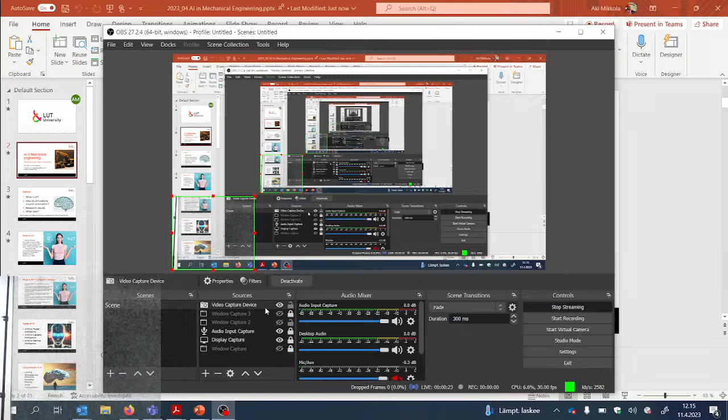Can you hear? Yep, he's unmuted already. So it looks good, and you are online. Okay, it's working, started the streaming. Yeah, streaming is on. Okay, one more thing, this one. Five seconds as usual.

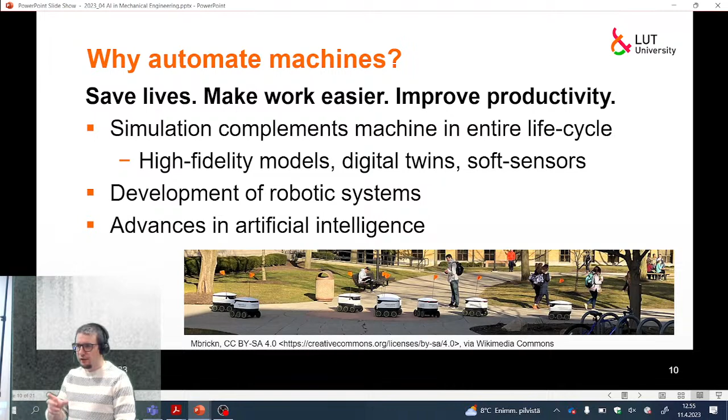Now the question is how to use all this that we are learning, this multi-body system, into AI. How to leverage our simulation and those automatic tools into AI.

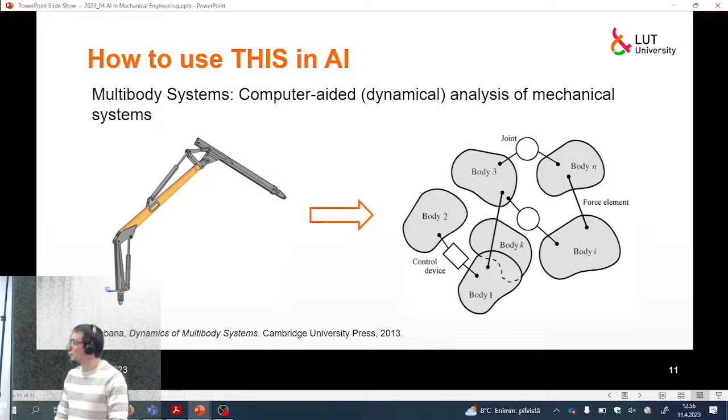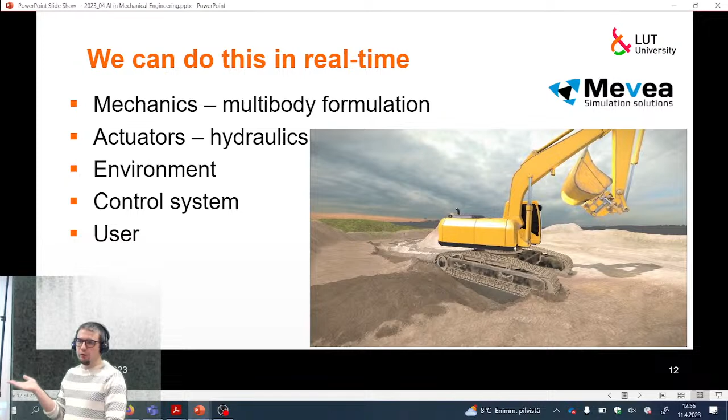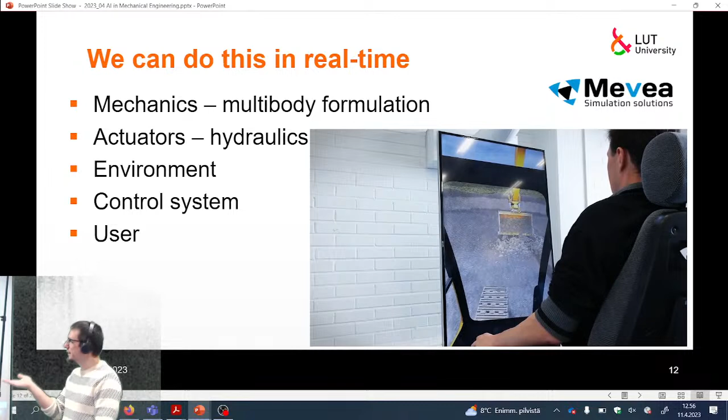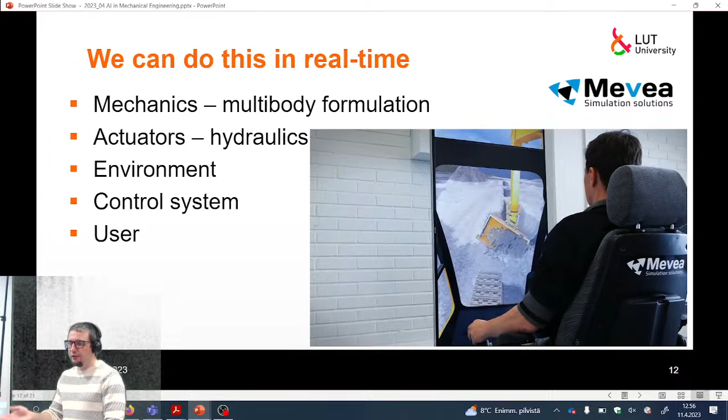What's important is what we can do in practice at the moment. We can create realistic, very fast simulations that can make, like here, this human-in-the-loop actions. It includes many phenomena, including the mechanics, the multibody formulation we are learning about, actuators - in this case mostly hydraulics - and environmental modeling with soil systems. And if we add some control system, we're ready to prepare a good product that can be quite easily, not super easily but quite easily, deployed on the real machine.

So we want to leverage computer simulations to develop all these systems, and one of the main ways is to generate synthetic data.

Okay, I suppose that will do it. And it even hangs. Yeah, it seems so. Of course, I can describe what was there. Can you try to go back? Okay, no. Why did it disappear? It's kind of there, but it's not visible.

Okay, it was a YouTube video of the Google robot farm.

This is a famous example that you can train the system without synthetic data. They used hundreds of robots in their laboratory, making pick and place actions, recognition, and others. So it's possible, but there are issues. It's hard to put 100 excavators somewhere in the field and ask them to dig something just like that. It's time consuming and still costly. Google can afford it, but there aren't many companies or universities that can buy 100 robots just for a single test and run them.

So generated synthetic data is very important. If you want to deploy something useful using reinforcement learning or other AI, we need plenty of high quality data, and usually our simulations, high fidelity simulations, can provide that data. With those simulations we try to predict the future. It's not a new thing, but it can be used in a quite unique way, because by predicting what will happen in the future based on different control inputs, we can choose the best one. There are arguments for that.

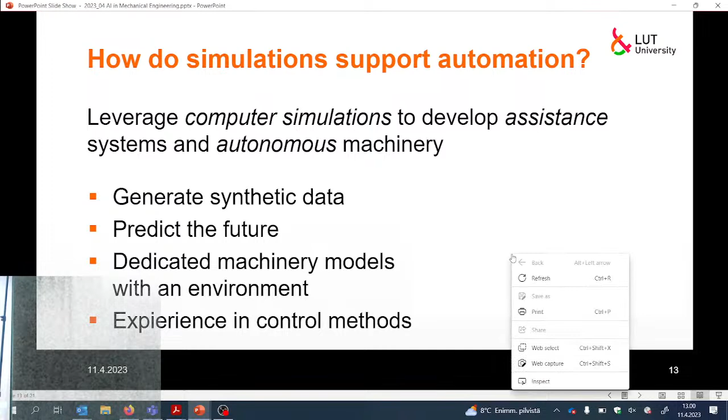These videos, I need to find the Google robot one. Because I can't find it. Google Robot Farm - was it a farm? I don't know. About farming, yeah. Okay, so it's Google Robot Factory. No. Okay, maybe you can provide the link for that video later. Or is it visible now? No, somehow it disappeared. Yeah, it was there. It was here, you can, yeah, there. It is playing, I think it is playing now. Okay, maybe. It is playing now. Large scale data collection - okay, so it was simple like that. Here now there is a...

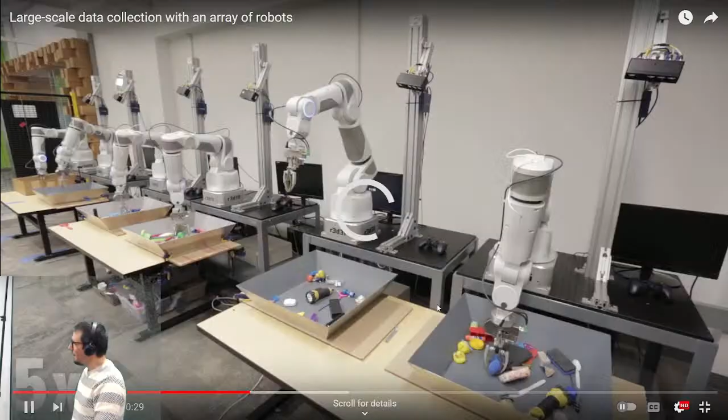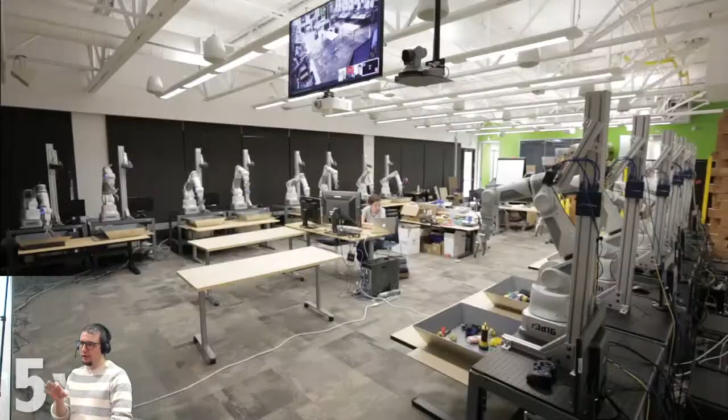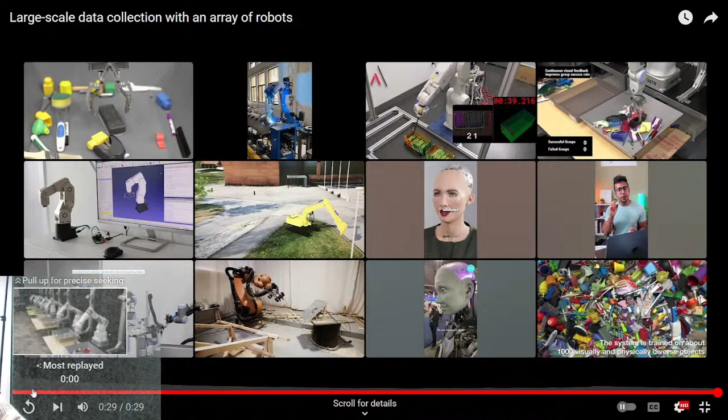This is a famous example showing that despite those algorithms being data hungry - of course they try to find ways to make it less data hungry, like curriculum learning and similar stuff, but in general they are still quite hungry - they created this kind of farm of robots that can really learn.

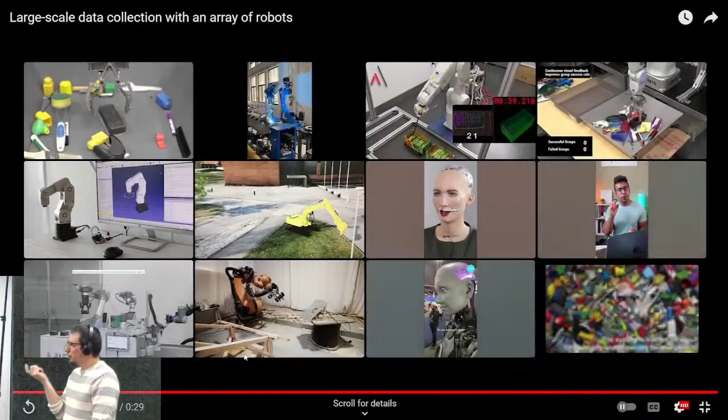But still, if you replace each of those robots with an excavator, it can be done, but this is still a very controlled environment. This is not very complicated. It's controlled, so it's quite easy to ensure they won't cause harm, because industrial robots already have control systems embedded that, for example, prevent them from making collisions. And that's not the case for excavators.

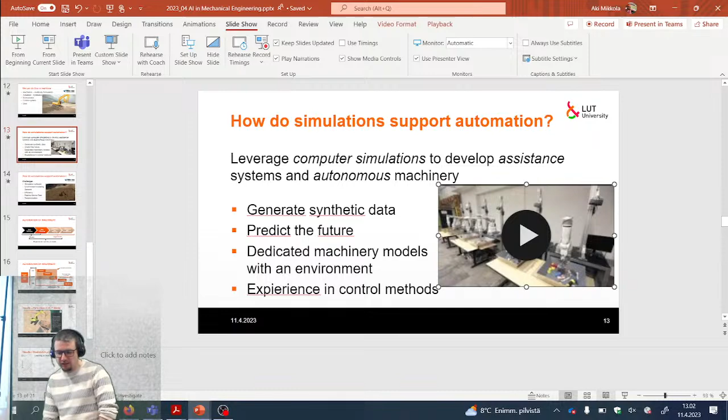You have to equip them, because usually they are designed to be controlled only by humans, so they don't have any special safety measures. So generate synthetic data is very, very important for predicting the future, and then we need dedicated machinery models with an environment. This is also something we've discovered through our research - this is a skill by itself, because you have the model, but the model isn't enough, because you have to have a way to control this model, and there are specific procedures to control the model. For example, the environment is important - maybe you've heard about domain randomization and other stuff. So it's not so simple.

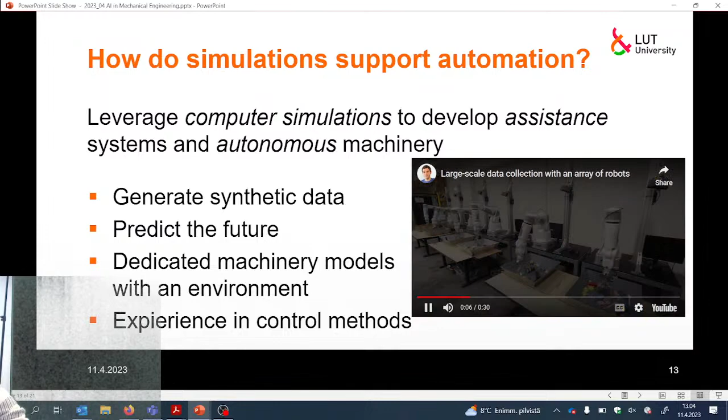So we have found it really challenging. There's plenty of room for improvement for every one of us to get there, and of course some experience in control methods is needed. We are also not very experienced in control methods. With robotics, having basic control allows you to progress with artificial intelligence control faster. With excavators, we don't have any kind of control, which makes it more and more difficult. Okay, now it works, but now we don't need you.

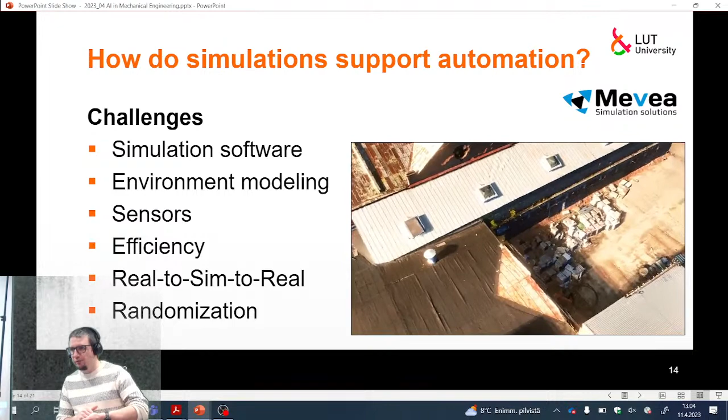So here's another example, an environment that's shown. I think this is a promo video from Mevea that shows that with Unity 3D you can make a really nice environment that's looking good, but there are so many problems when you want to really use it for learning that it's hard to tell where to start. It looks nice, it's good, but it's not enough for those algorithms to learn.

This is difficult because while all the surrounding is nice, notice that this work field is flat, more or less, and we're more interested in making this work field interesting - maybe having some stones there to make the digging more natural, making the shape different, changing, finding a way to climb, and many other things. So one thing is being visually appealing for humans and for games, another thing is making it useful for training. So getting proper simulation software is already a bit of a challenge to tick all those needs required for learning.

Yeah, we haven't tried this with different software. Everyone has this weakness, but companies are aware. And even when we discuss this, despite that, AI is not so heavily used in robotics, heavy machinery, and multi-body dynamics. When we discuss with people who use these methods, I think they are very positive about it. So it just needs time to be solved.

Environmental modeling, this is more about us, and it's still a little different than just creating the model. It requires us to know AI, because if we don't know the rules for creating AI into those intelligent agents, we cannot create good environments. We can create a great model for the machine, but that's all. We need the whole environment and structure, and we need to tell this device what it means to be rational. Still, it's up to humans. There are ways to get this knowledge from the operator, but that's another topic.

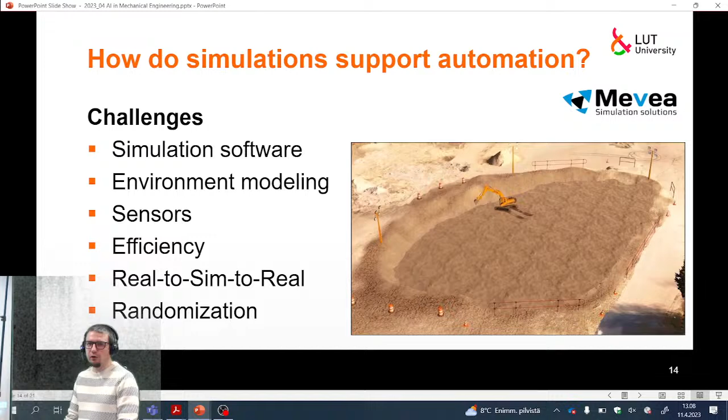Real to sim to real - it's great that we can make all this in the virtual environment, but then we want to put it on the machine, or maybe get some information from the machine back to the virtual environment. Another branch of AI that you have to be aware of and know about. Domain randomization is a very important topic - for each simulation, for example, the terrain should be different, maybe the machine should even be different. If you want a camera sensor, maybe it should have different colors, weather conditions, lighting, a lot of stuff.

Next part is localization and mapping. That is essential for this machinery, because you have to know where you are and how your environment looks. You have to have those sensors - this is called SLAM, simultaneous localization and mapping. You get the sensors, create the map, and localize yourself within this map. Of course GPS is not everything, because it's usually not accurate enough, and it won't tell you that there's a tree in front of you. It's another algorithm, so you need sensors like lidars, cameras, and others to make it work.

And at the very end, when you have the task to harvest this forest, you will harvest this batch of the forest, and then decide which trees you will harvest.

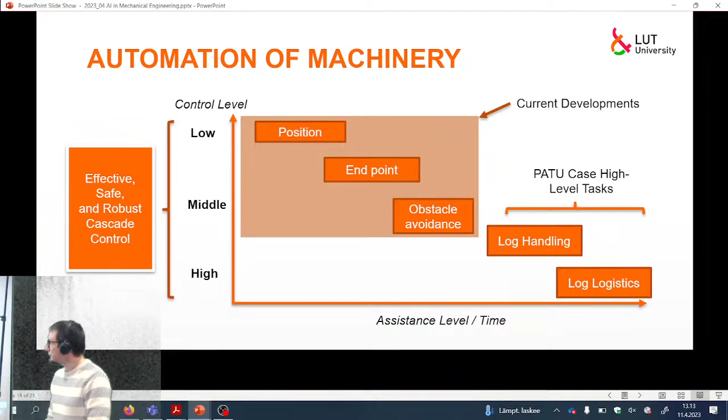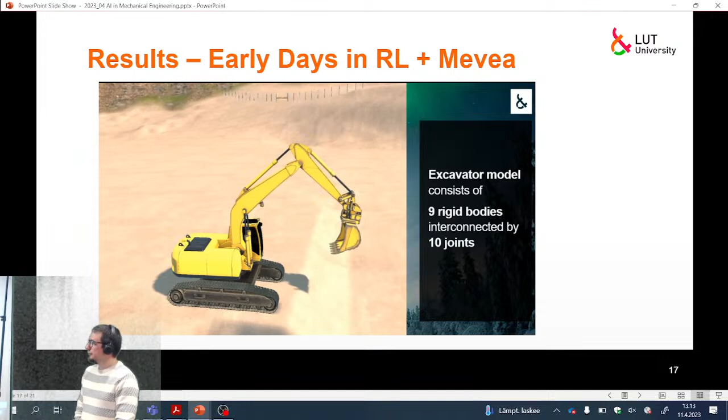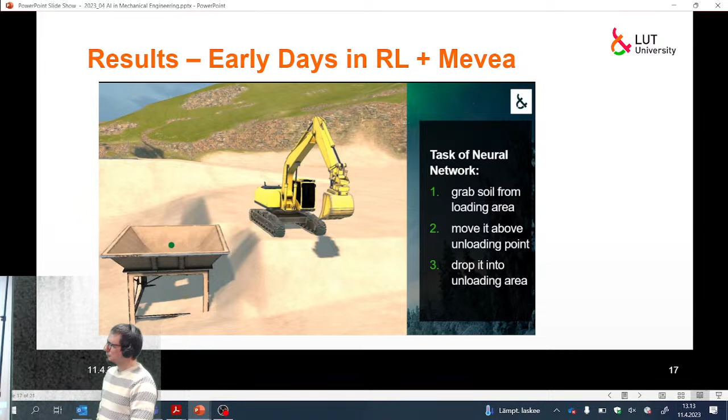So this is our work done some time ago. Here's the design of how to control this kind of excavator to make simple digging. As you can see at the start, it really doesn't know at all what to do, but slowly... maybe it should go faster. First trials weren't very successful, of course, because this was training from the start, but in the end it was able to put some earth properly into this hopper, maybe not ideal.

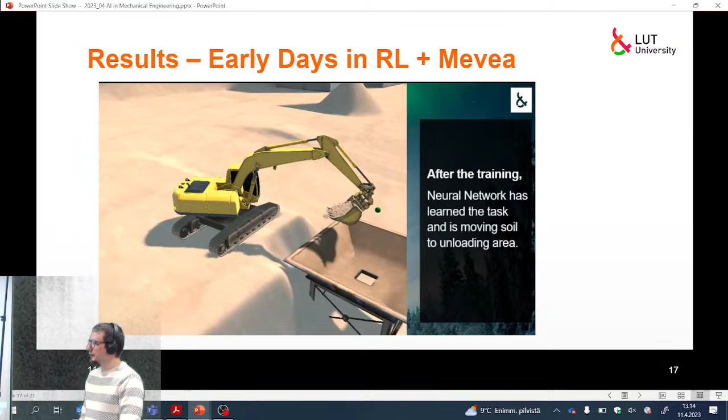But there are many missing parts here. So this is the kind of scenario that shows that this is possible at all. Now there's a lot of things that should be done to improve it. So after training neural networks, I think here we use the PPO algorithm.

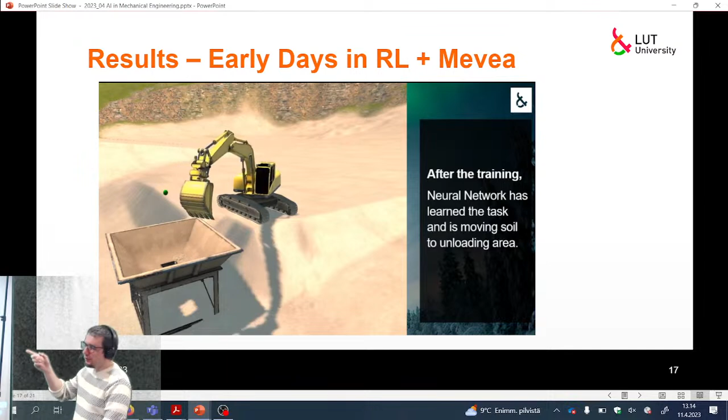But you know what is the main limitation of this example? If you want to make another bucket, then it's going to be another set of trials, even with a different shape of terrain. And also, the task description was very detailed, and sensor information was very dense.

So then, to make more basic research, we switched to pendulums. This is the favorite example for mechanical engineering. The favorite is the normal pendulum, but because we have already controlled normal pendulums, it doesn't make sense. So we invert those pendulums, and to make it more enjoyable, we stack several of them.

The thing we want to work with a little more now is this kind of example, like this Patu crane. Quite simple, hydraulically actuated, so it more reminds you of this kind of robotic example from Google. Now it's quite easy to control it in a simple way like here, but we want to make it far more robust. Avoiding obstacles, that's going to be a big challenge there.

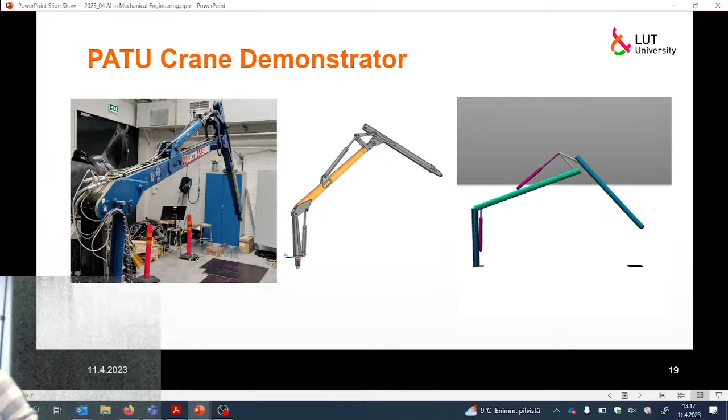Yeah, and of course. So plenty of things to do, a lot of ideas, and I'm sure that if we start digging into some of those ideas, we will get even more. But we gain experience, get better into the field, start knowing people, get to work with those core AI algorithms.

Even quite recently, I have seen on Quora a question about whether the AI field is too crowded. The answer was not really, not in the sense that there are too many people involved. That was the answer from one person who developed those methods, but they do not feel so. There's a lot of hype about this, a lot of talking about how to use it, but the people who really are into it, making it, developing it, and using it, are far less.

Also, as you can see, even in the Nordics when they ask that, most companies want to use AI, but most of them have issues with using it, and one of the main problems is lack of people who know AI and know how to use it. So they are really willing to use it, but it's difficult.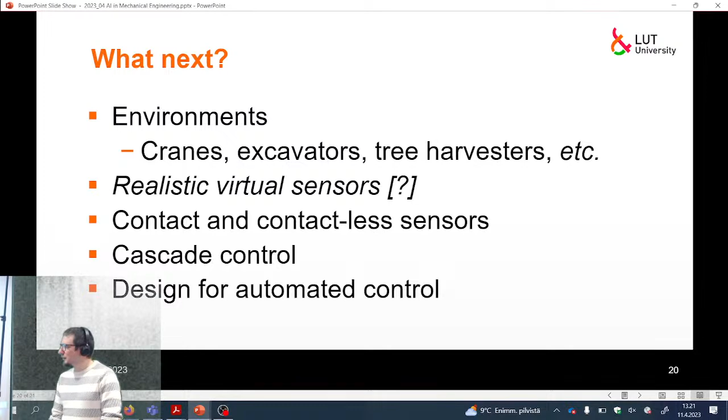I think we can put most of the components together. Of course, we most likely cannot build a fully autonomous system, because for sure we'd have issues with computing power and generalization. But at the current state of the art, I think we should be able to make decent assistive systems — though a lot of engineering work is required to tune those systems to our needs. So assistive systems, not autonomous. We aim for autonomous systems at the proposal level, but what we want to get here mostly is assistive systems, though it depends on which level of assistance we are talking about.

Because there are many levels — even here, supervision and assistance can go through all this. Even if we get a system that can cut trees by itself and get to those trees, we still have task planning. Another thing is we'll get configurations of trees in the harsh environment that cannot be recognized and handled by the AI — maybe 1 in 100. We need assistive systems, at least with human supervision, and that human can even go into the mode of teleoperation. We'll have to, I suppose, develop and cut a thousand of those forests, and then make it more bulletproof.

So I think it's unfeasible to think that we can get into full automation because of those reasons. Even if you have a very good system, there will be something surprising that happens because those environments are so unpredictable, and they can be very different.

The combination of slopes, weather conditions, slippery surfaces, and other factors. For example, we know so little about the soil, and how to drive into the soil. We cannot model soil well, for example.

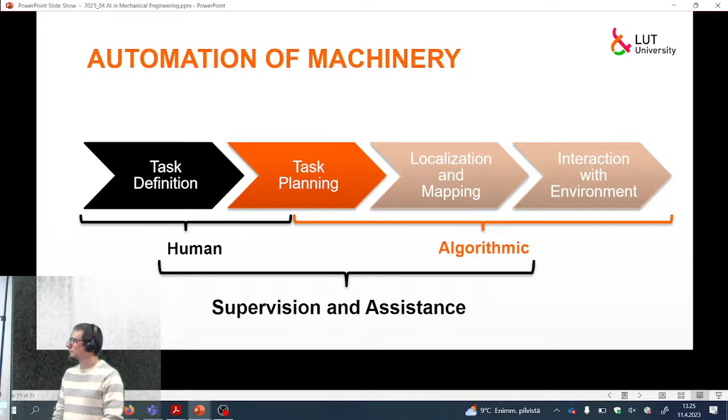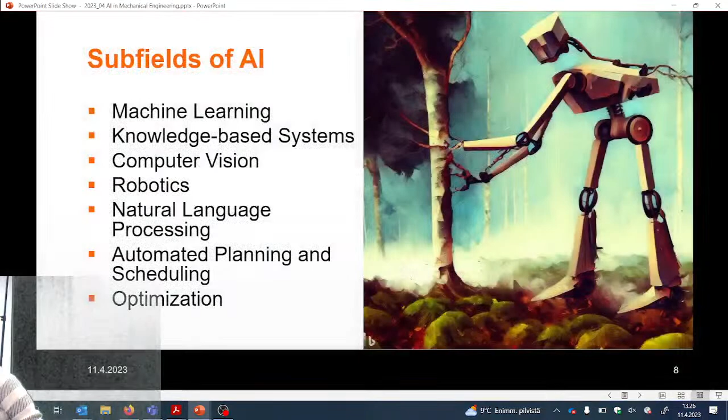Those figures are really something to think about, and this ChatGPT is something I need to check out. Each of these figures, I think it requires some...

Yeah, it's quite nice, but it requires some tuning. Overall, it's based on what information AI has. Even the amount of information matters, because we discussed that of course it gets better results when you write 'show me a photo of the robot on legs standing somewhere' and then provide quite a lot of background information.

And here, what does AI know? Not much. So what about when you say excavator and front loader? One of them, the wheel loader, is very good. The other one not so much, it's like a tractor and then something else.

I suppose it can be tuned as well, but you have to learn it, because they advise you that you can use some kind of description of what you want to get, like maybe some kind of art, painting, and others. So that's why I think it's important to use those tools, to experience them yourself, and also to find all those limitations.